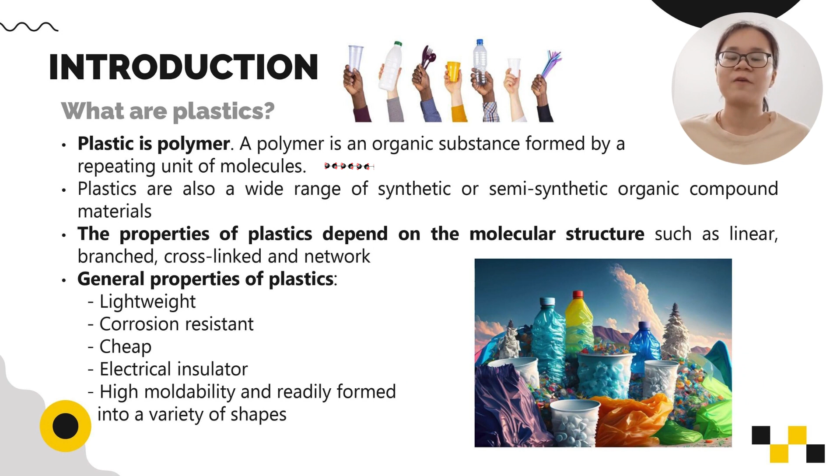To begin, what are plastics? Plastic is a polymer. A polymer is an organic substance formed by a repeating unit of molecules. Plastics are also a wide range of synthetic or semi-synthetic organic compound materials. The property of plastic depends on the molecular structure, such as linear, branch, cross-links, and network. The general properties of plastic are lightweight, corrosion resistant, cheap, electrical insulator, and high moldability.

Plastic can be classified into two major types: thermoplastic and thermoset plastic. Thermoplastic can be softened and reformed after heating. It can be processed through extrusion, injection molding, and blow molding. It is also known as recyclable plastic. Examples of thermoplastic are ABS, PVC, polyethylene, and nylon.

In contrast, thermoset plastic cannot be reprocessed and reformed after heating. It forms a three-dimensional cross-linked network. It is harder than thermoplastic and also known as single-use plastic. Examples of thermoset plastic are epoxy, polyester, and melamine.

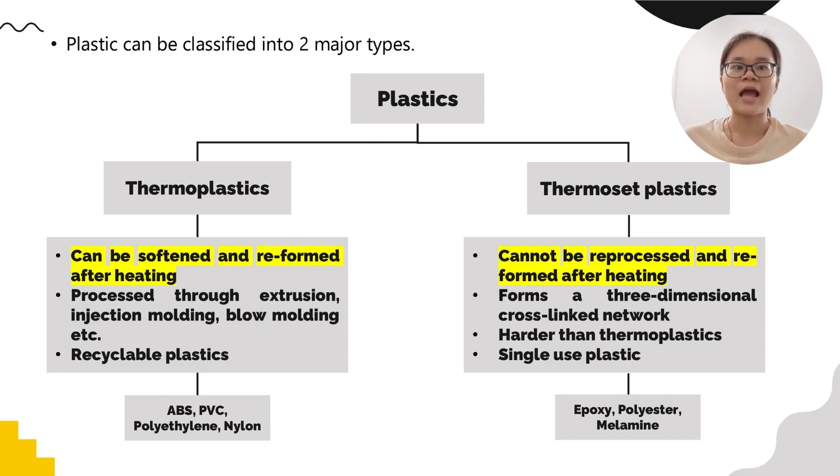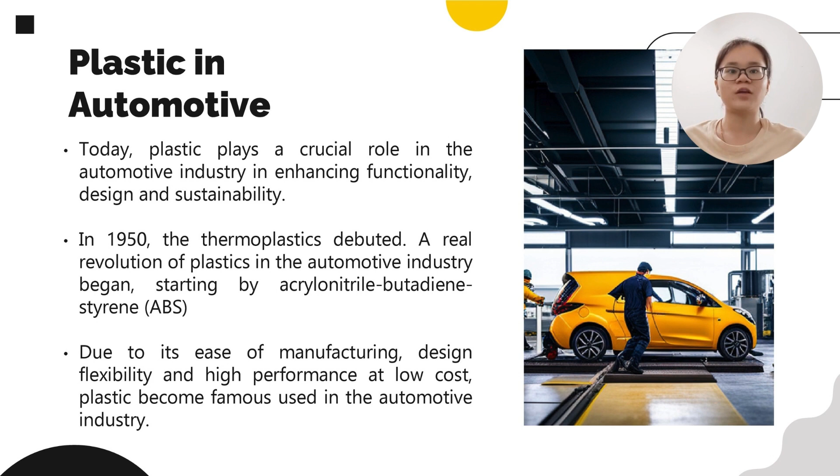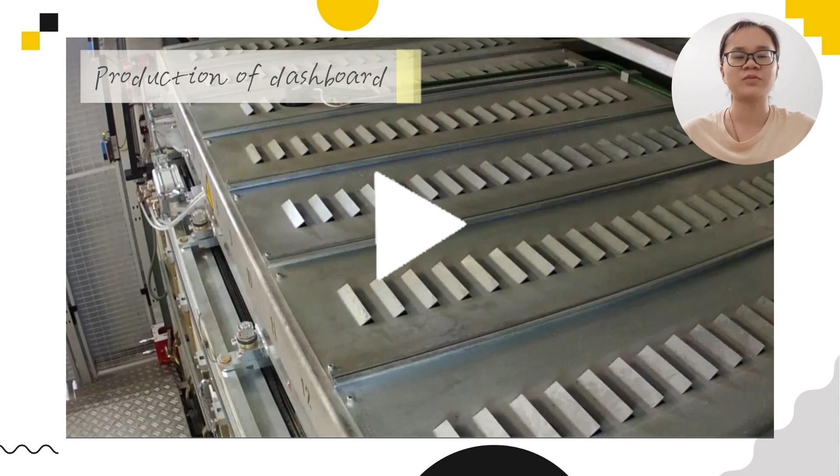Today, plastic plays a crucial role in the automotive industry, enhancing functionality, design, and sustainability. In 1950, thermoplastic debuted. A real revolution of plastic in the automotive industry begins, starting by ABS. Due to ease of manufacturing, design flexibility, and high performance at low cost, plastic became famously used in the automotive industry. Now let us watch a video that shows how plastic is used in the automotive industry. This video will show the production of the dashboard, including injection molding and thermoforming.

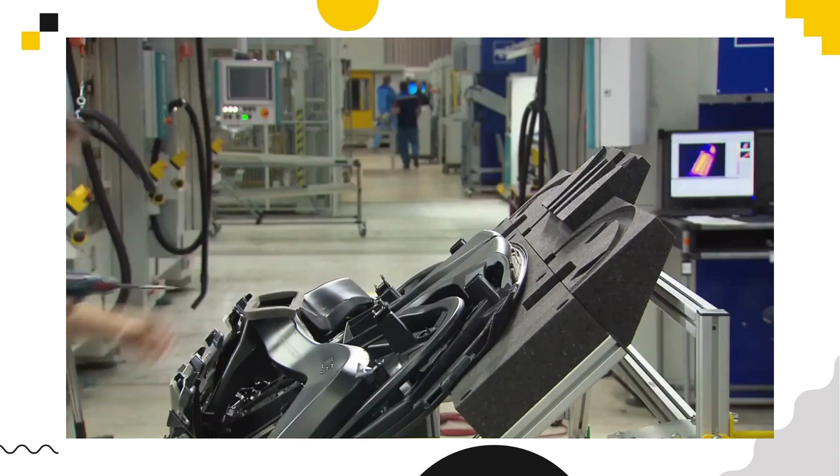We can see a report from the American Chemistry Council based on plastic and polymer composite in an average automobile. From this table, we can clearly see polypropylene is the most widely used plastic in the automotive industry. Besides, we can see the numbers of plastic and polymer composite used per vehicle increase year by year.

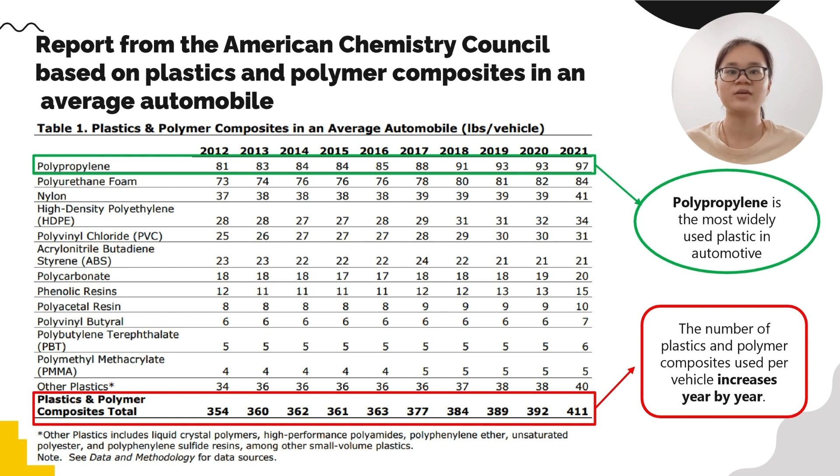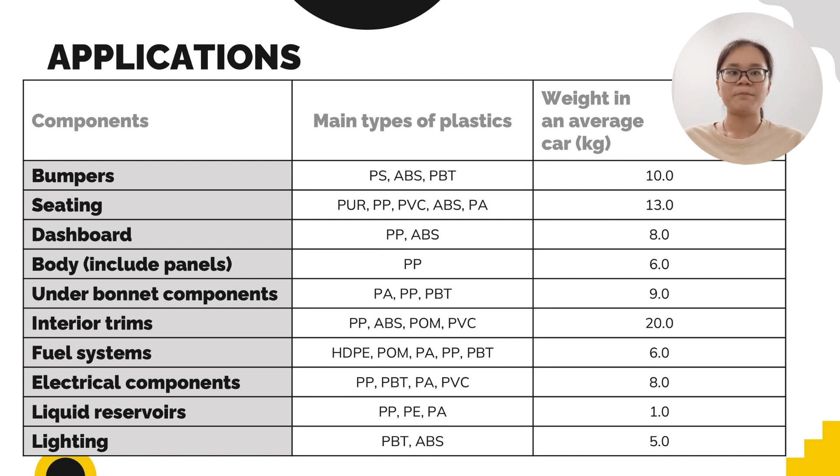Next is about applications of plastic. For example, the main type of plastic to make bumpers is PS, ABS, PBT. For seating it is PUR, PP, PVC, ABS, and PA. So let me choose some types of plastic to discuss further.

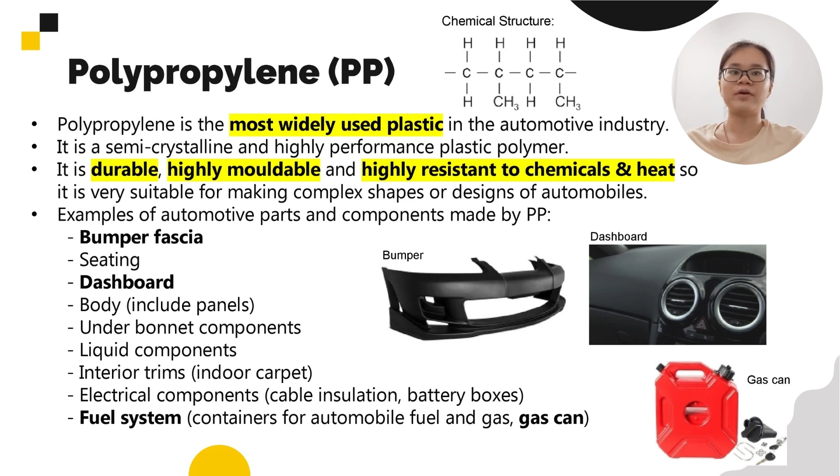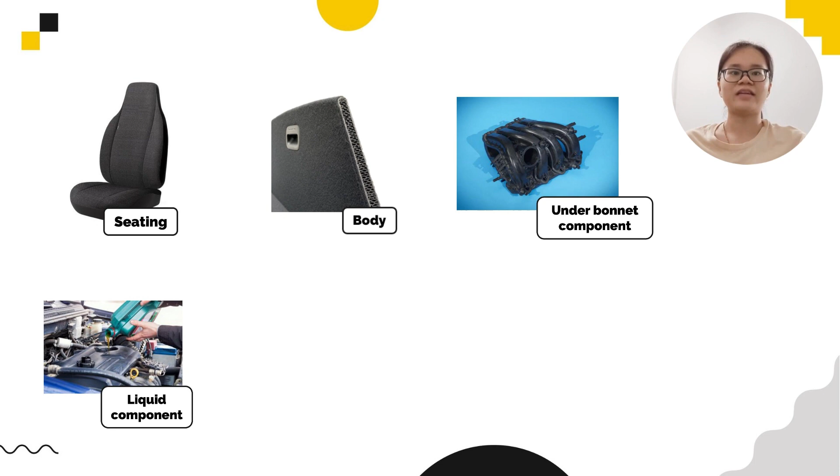Examples of parts made by PP are bumper fascia, dashboards, and fuel systems like gas cans. Other than that, seating, body, under bonnet components, liquid components, interior trim like indoor carpet, and electrical components such as cable insulation and battery boxes are also made by polypropylene.

Next is ABS. The full name of ABS is acrylonitrile butadiene styrene. From its name we know that ABS is basically made up of three monomers: acrylonitrile, butadiene, and styrene, through polymerization. The picture shows the chemical structure of ABS.

ABS is a durable and strong plastic, so it can absorb impact energy to keep the passenger safe. It also has a shiny and impervious surface, so it is often used for enhancing good appearance decorations. It is dyeable and makes the product aesthetically pleasing. It exhibits good electrical insulating properties. Examples of parts made by ABS are steering covers, dashboards - there are two types of dashboard in the pictures - and also wheel covers.

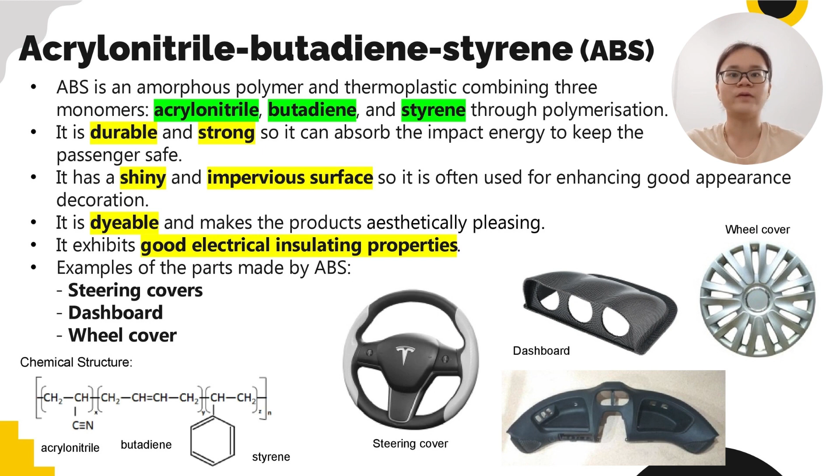Next slide is about polybutylene terephthalate, also known as PBT. PBT is a semi-crystalline thermoplastic material. It is strong, tough, and stiff, providing excellent creep resistance. It has a high heat deflection temperature with a high temperature index rating, so it can protect parts from ultraviolet radiation. It is excellent in chemical resistance, so it can avoid erosion after exposure to chemicals such as alcohol, acid, or oil. Examples of parts are fog lamp housing, locking system housing, and sunroof front parts. Here is the chemical structure for PBT.

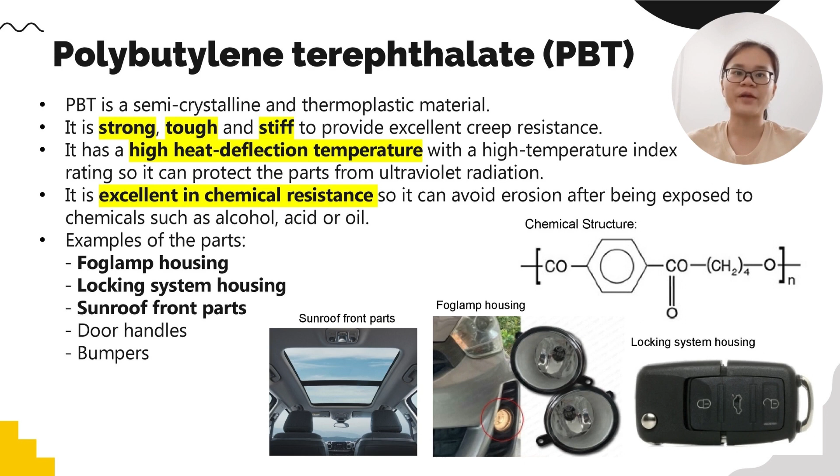Polyamide, PA, also known as nylon 6,6. It is durable and stable at high temperature. Its melting point is about 220 degrees Celsius. It has good wear resistance, fuel resistance, and an excellent oxygen barrier. It is a recyclable material.

The disadvantage for PA is good water absorption capacity. It will expand when exposed to wet or humid conditions. Thus, fiberglass is added to reduce its water absorption capacity. Examples of parts are airbags and door handles. The main material of airbags is polyamide.

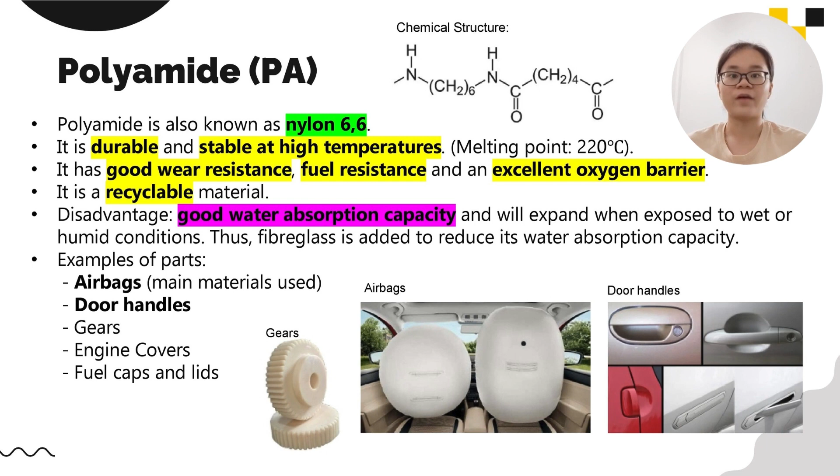Polyurethane, PUR. The picture shows the chemical structure of PUR. Polyurethane is joined by the links of urethane. Urethane is basically carbamate ester obtained by condensation of ethanol with carbamic acid. The special feature of PUR is it has a soft touch skin, so it will give comfort to the driver and passenger.

It is also lightweight, so it benefits fuel economy. It has high moldability, resilience, and strength. Thus, it can protect the parts from harsh sun ultraviolet rays. It also can shield noise and heat from the engine due to its good heat insulation and excellent sound absorption. Examples of parts made by PUR are seats and headrests.

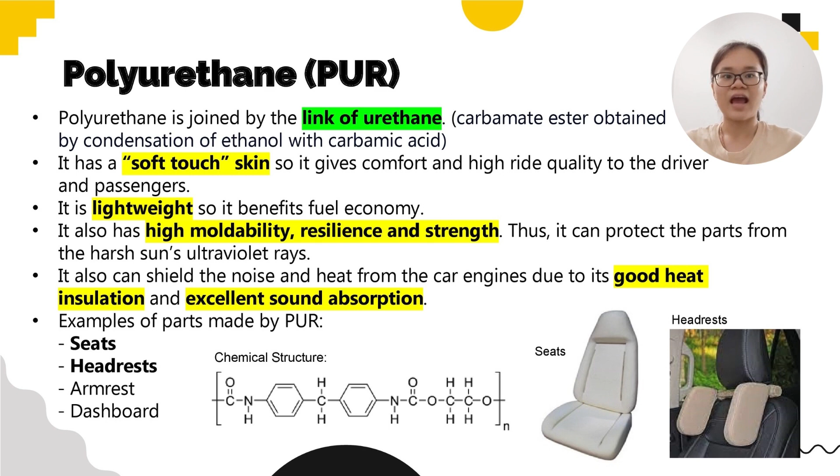So let us talk about technological advances. Toyota is a pioneer in introducing environment-friendly bioplastic into the automotive industry, for example bio-polyethylene terephthalate and biopolycarbonate. In the future, plastic in the automobile will be more focused on being more advanced, sustainable, smart, and efficient in manufacturing.

First, about sustainable plastic. We are looking at bioplastics and recycled plastic. Plastic recycling often uses water to clean and cool.

Next is advancing plastic technology. Plastic in the future will be lighter, high strength, and more durable. It also allows injection molding of the parts.

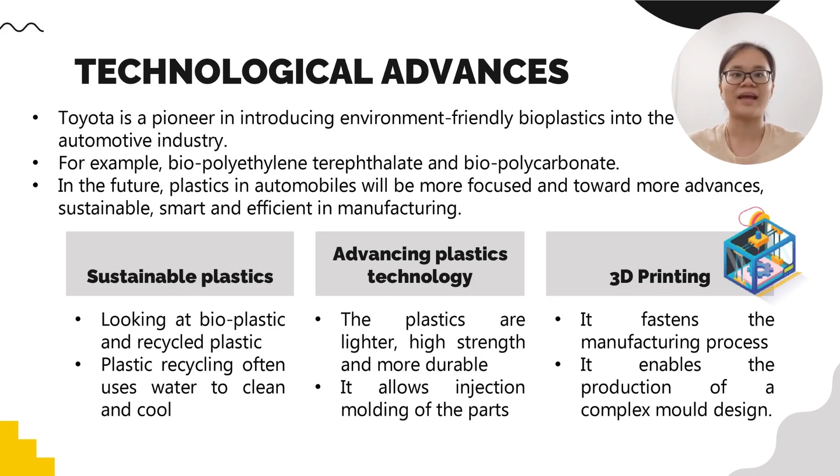Last is 3D printing. 3D printing fastens the manufacturing process. It also enables the production of complex mold designs. Currently, 3D printing has already become popular and a trend in the automotive industry. So let us watch a video to see how 3D printing has affected the automotive industry.

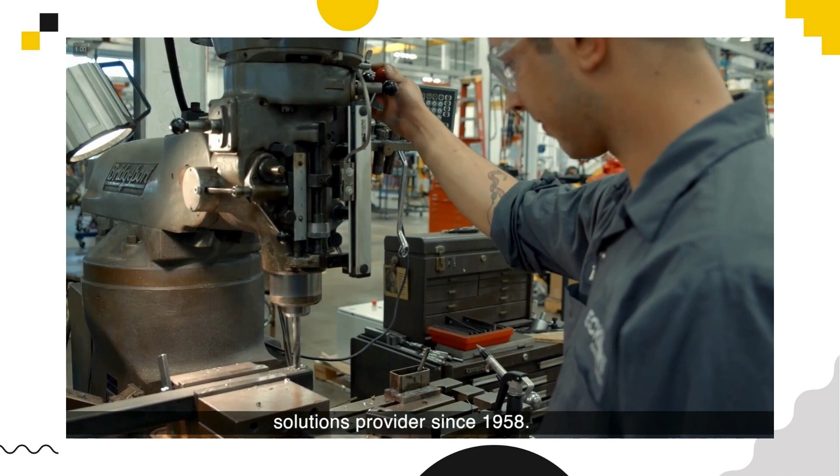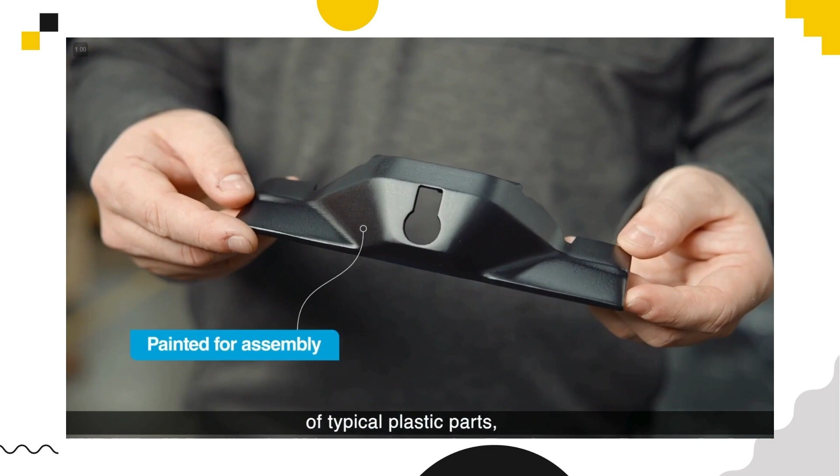Eckhart has been an industrial manufacturing solutions provider since 1958. Radford's built a number of really cool cars, and we're revitalizing the brand. We're the company that someone comes to when they need it built the first time. Stratasys is announcing that we've become a NASCAR competition partner. TRD finds itself in a very competitive business. 3D printing really allows us to stay at the forefront of that. Working with Stratasys has been a great opportunity for us. Some of the benefits include getting around the tooling requirement of typical plastic parts, while also being able to have a quicker turnaround time as well.

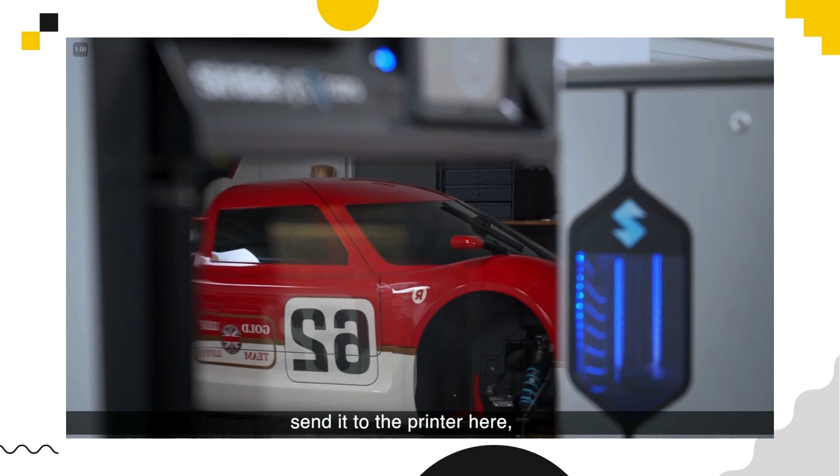We have printers on the shop floor, which is the dream, right? I can create something in 3D, send it to the printer here, pull it straight off later that day, and we can just drop them on the car straight away. We know we're always going to get a good quality product. We know we're not going to have issues with the printers. Once they show up, they're going to work.

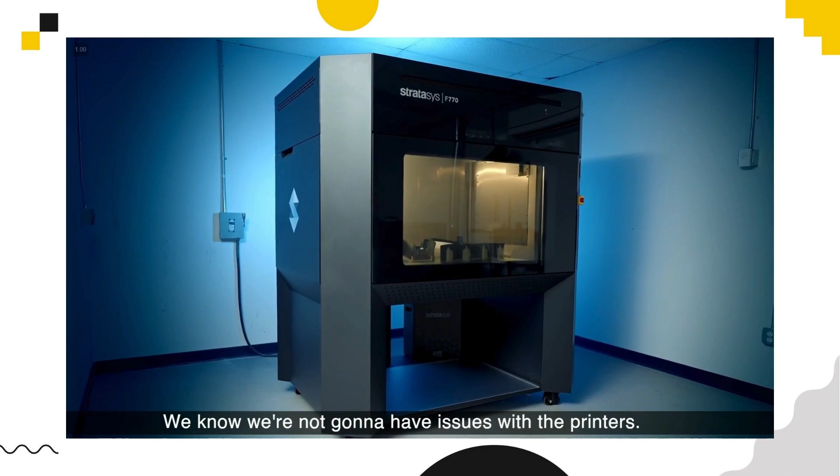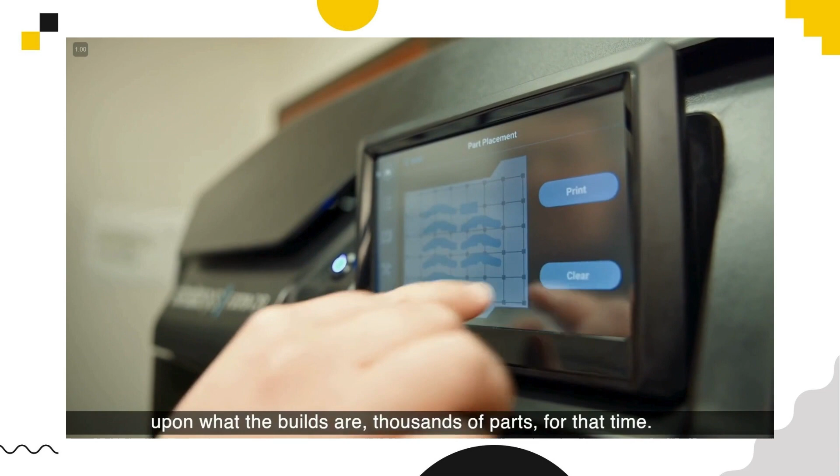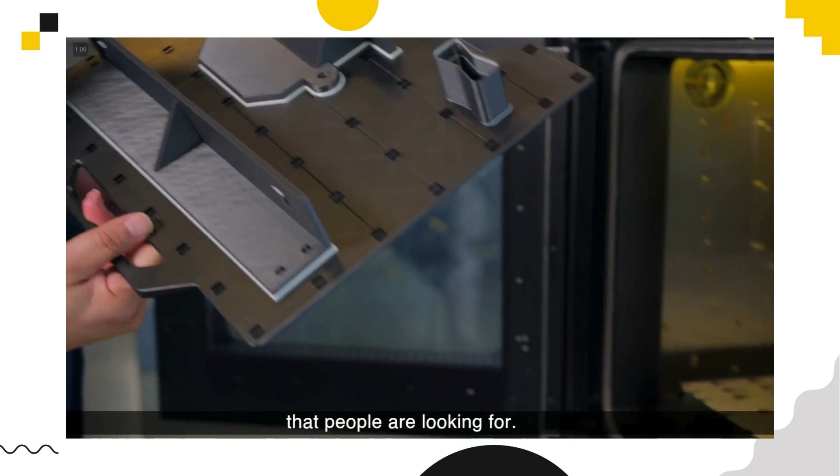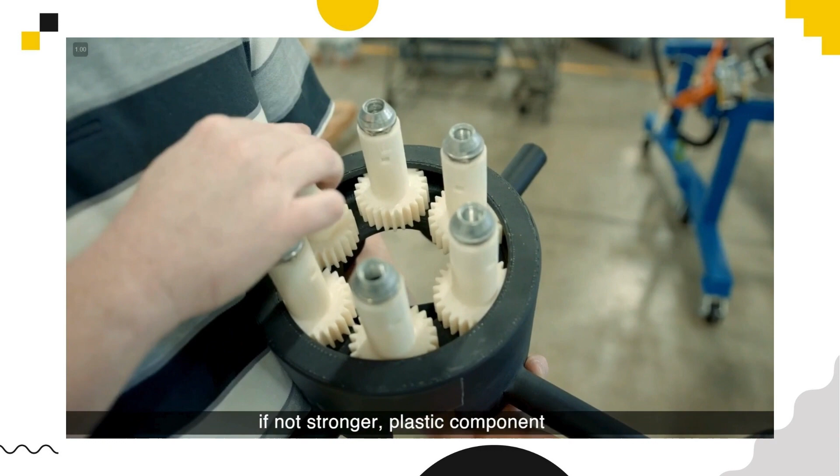We typically have all 3 printers running nonstop, 7 days a week. We produce hundreds, if not, depending upon what the builds are, thousands of parts in that time. Some of the properties we like about ABS-CF10 is it's lightweight and it gives the extra strength of material that people are looking for. Eckhart's motto is for the life of your line. Anytime we can replace a historically metal component with a lightweight but equally strong, if not stronger, plastic component, then we believe we have fulfilled exactly the promise to our customers that we've made.

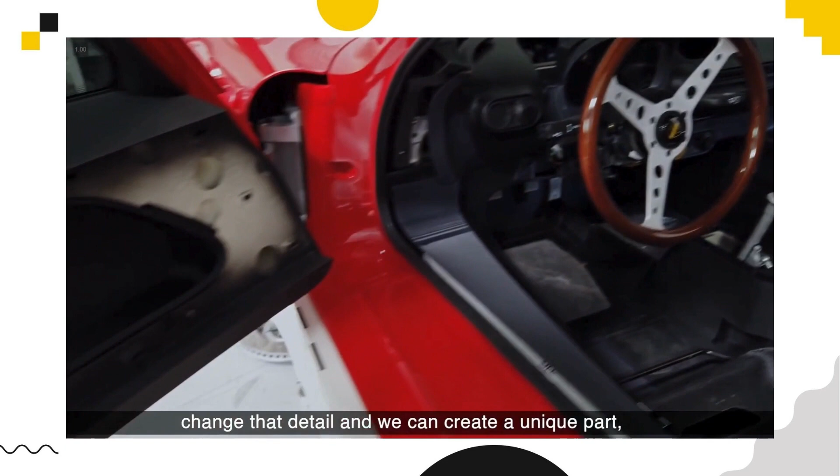Now a customer can hypothetically walk in, change that detail, and we can create a unique part, like a door card, that suits our customer. We get that one-off experience, and we have the ability to do that at the press of a button. By going with 3D printing technology, we're able to take a 3 to 4 month project and get it down to about 8 weeks.

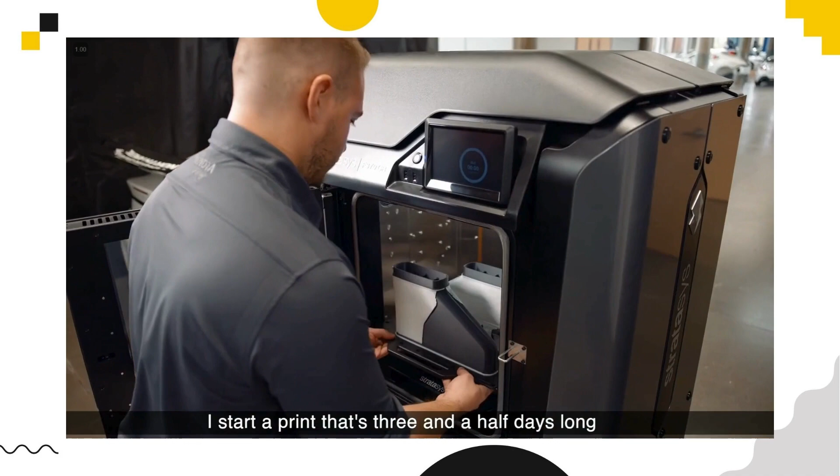I don't have any worries whatsoever. I start a print that's 3.5 days long, and the most inconvenient part is being impatient and waiting on the part to finish. We took a lot of feedback and advice from the engineers and experts at Stratasys to help direct us on what we really needed. That was a great dialogue back and forth between our engineers here and the engineers at Stratasys that led us to a solution.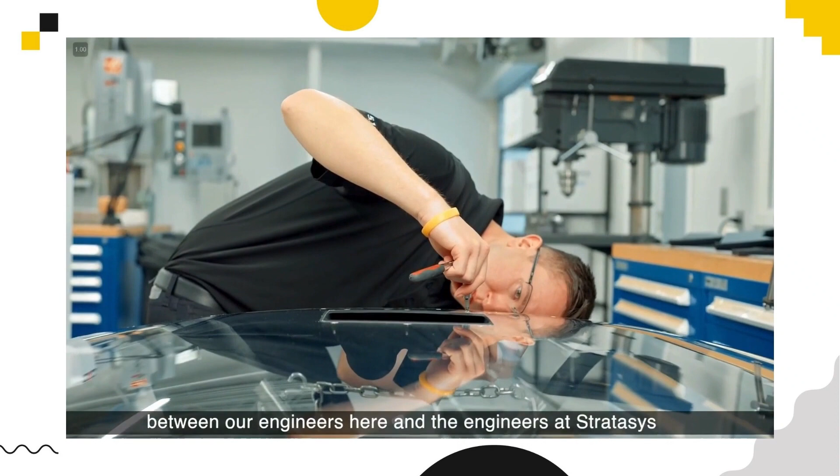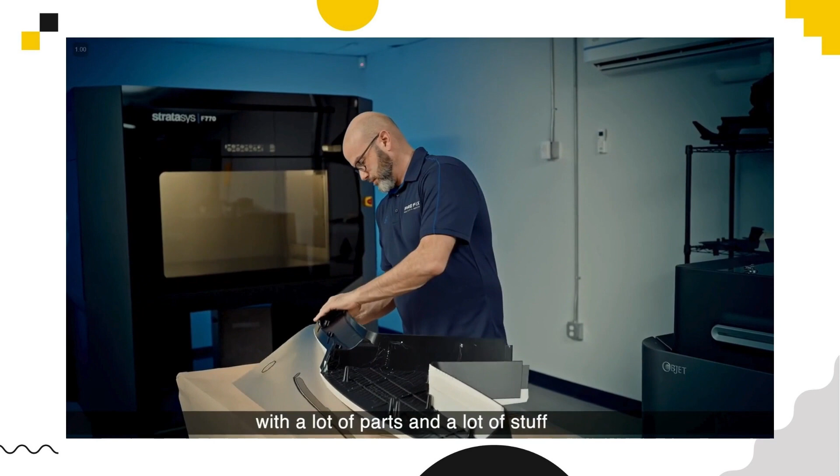Toyota has a reputation for very high quality, and one of the things we have to do is pick partners such as Stratasys that can allow us to achieve that. We have a lot of projects going on at one time with a lot of parts and a lot of stuff that needs to get done quickly, and we don't have time to print a part 2, 3, 4 times to get it right. We need to have one and done, and we always get that with Stratasys.

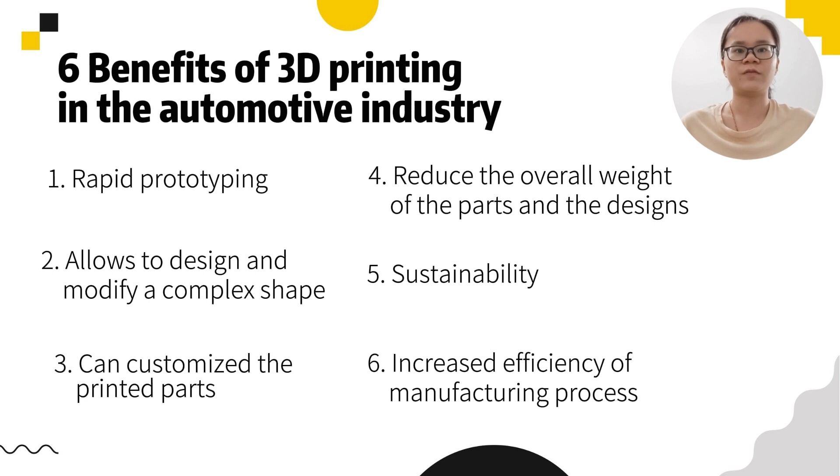Based on this video, we know 6 benefits for 3D printing in the automotive industry. First, rapid prototyping. Second, allows designing and modifying a complex shape. Third, can customize the printed part. Fourth, reduce the overall weight of the parts and the design. Fifth, sustainability. And the last one is increased efficiency of manufacturing process.

In conclusion, plastic has become a cornerstone in the automotive industry for improving fuel efficiency due to its lightweight, enhancing design flexibility, and contributing to safety features and sustainability. As the industry continues to evolve, the role of plastic is likely to expand, driven by innovation, environmental considerations, and the ongoing quest for improving vehicle performance.